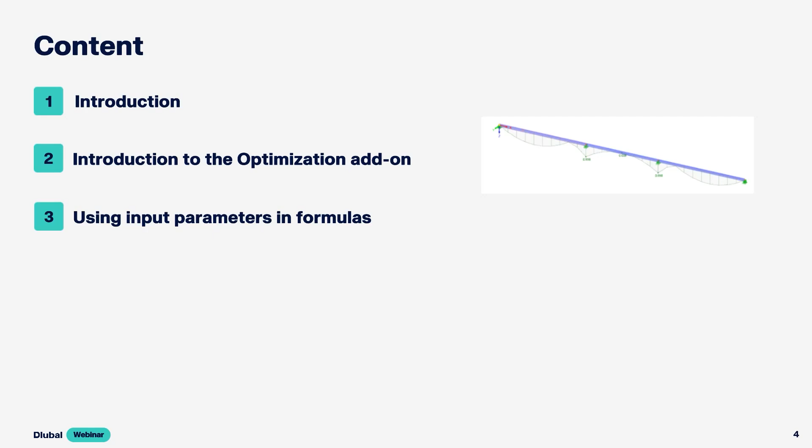Today we want to deal with the optimization add-on, and first of all I want to show you how to activate the add-on and give you a small introduction, and after that I'm going to show you how you can use this add-on to optimize global parameters and how to use parameters in formulas and optimize them. So we are going in.

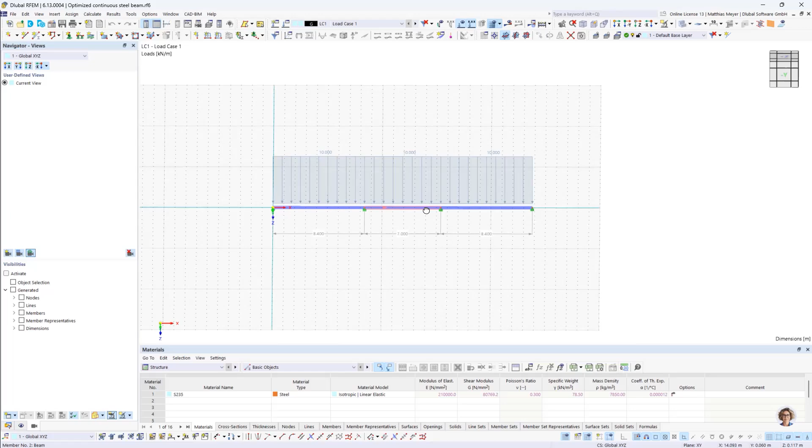First thing I want to do is optimize a continuous steel beam. It's going to look like this. We have two outer fields which have the same length and an inner field, and the length of the outer fields differs from the center field. So we have a symmetric system.

And what we also have is a continuous constant load of 10 kilonewtons per meter. We also want the self-weight activated, and we ask ourselves, okay, how long can this beam be at its maximum, which length it can span. The material is given, and also the cross-section is given. It's an IPE 240 and we have S235 steel. All right.

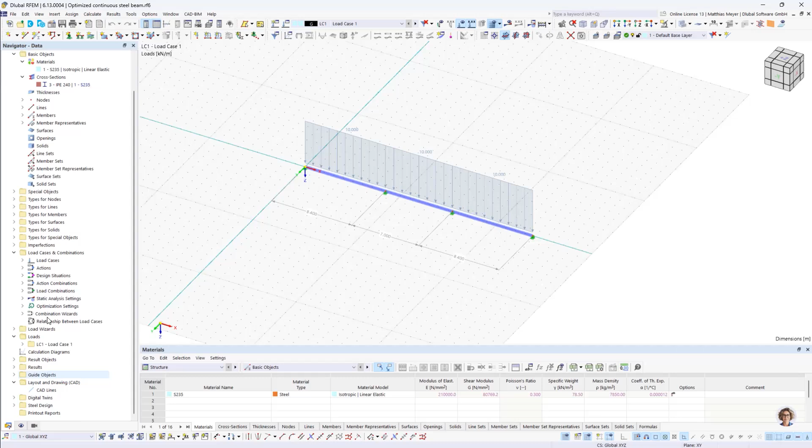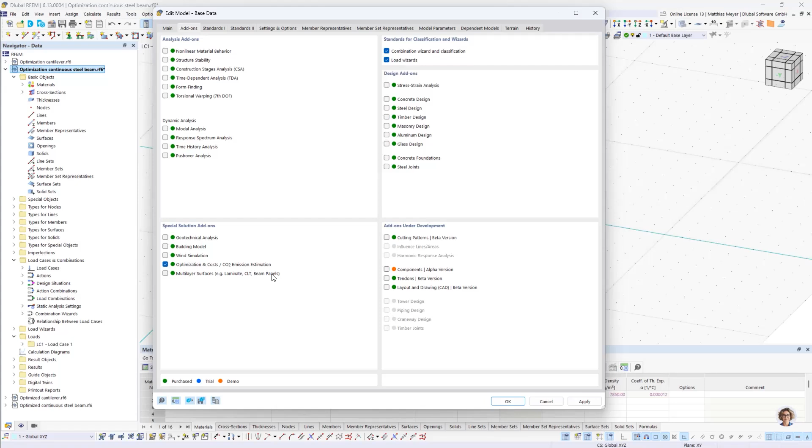So first of all, we have to activate our add-on. We're going to do this at the base data interface. Until recently, the add-on was here on the right side. Now it's on the left side. We activate the checkbox. We also want to activate steel design. And we're going to choose the recommendations of the CEN. And click OK. And the first thing we have to do is define our nodes.

The first node will be at 0, 0, 0. The second node is at 5, 0, 0. We don't know what the maximal span length is. This is just a guess, and for start I'm guessing it's 5 meters. And so the next one is at 10 and the last one at 15.

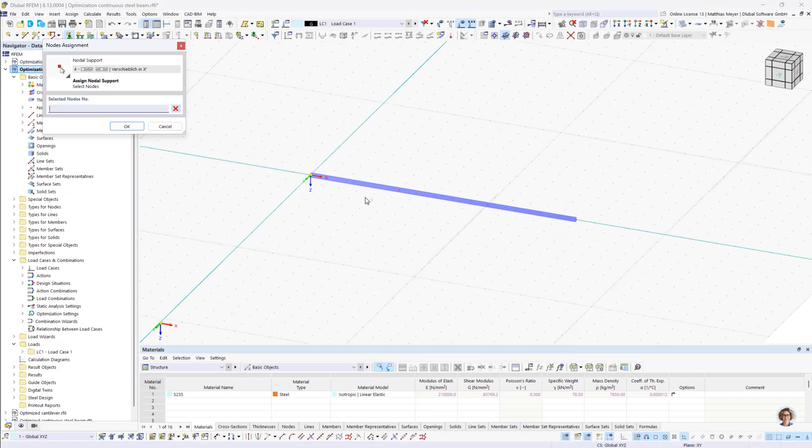All right, then we have to put our beams between the nodes like this. Then we have to add some supports. The first node will be fixed in X direction. Okay. And the other nodes are not fixed in X direction. Okay. Small check if everything is all right. It is. And then we apply some beam load.

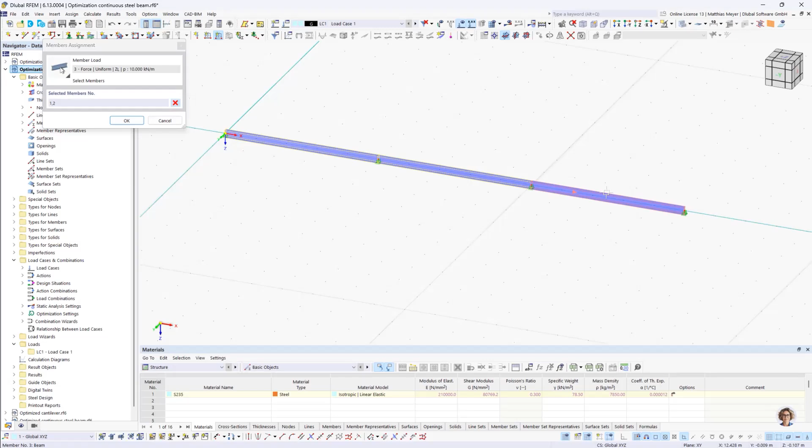Oh, this was the wrong interface. We need this one, of 10 kilonewtons per meter. And like I said, the self-weight is activated. And now we don't want fixed lengths, we want them dynamic. So what we are going to do is we open the nodes table, and now we define some global parameters. I am going to delete them.

Yes. All right. So we go to global parameters like this, and then we call the length of the outer fields L outer. We can also make comments to describe our parameters. Call this length of the outer fields. And then we have a length of the inner field. And give it the same kind of comment.

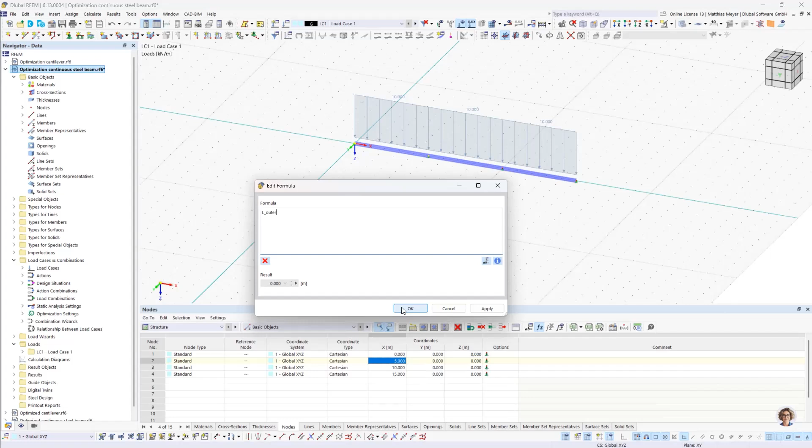And that's it for now. And now we have to make the coordinates of the nodes dynamic. So the first one is still fixed, but the second node should be dependent on the length of the outer fields. So we give it this parameter. We can also switch between parameter view and absolute view.

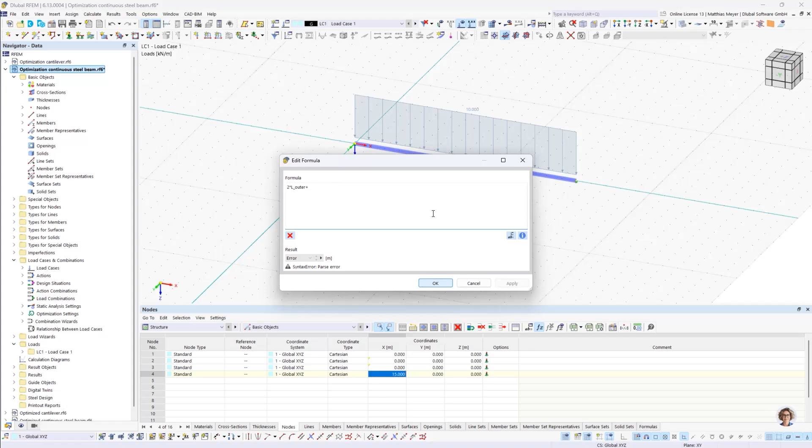So now it's all on 0. Why? Because we have to define some values in here. Like I said, we can start with 5, but we actually want to optimize this parameter. So what we are going to do is we need a third formula for the whole length. So I call this L whole. And we define this as an optimization formula. So we define a formula, and the result of the formula we want to optimize.

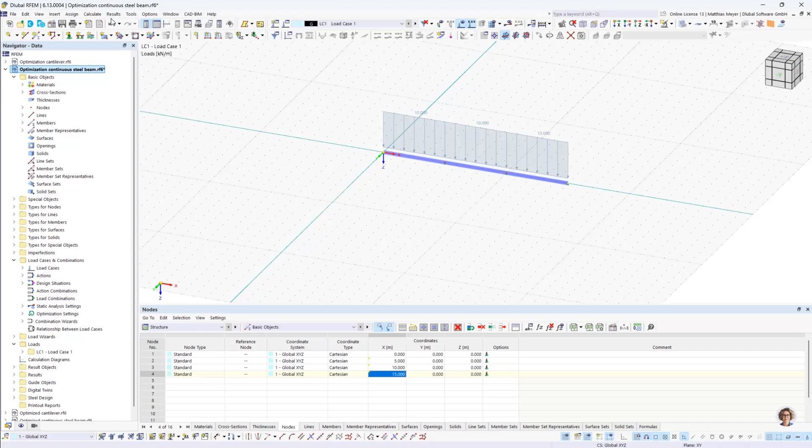Yes. So the whole length is 2 times the outer length plus the inner length. And right now it's 15 meters. And then we press OK. So our beam is back. And now we open our optimization interface here at Calculate, Optimization Settings.

And we want to maximize our whole length. So what we're going to do, we choose max global parameter. This is also new, also min global parameter. So these options are for minimizing or maximizing global parameters. Here we still have a problem because the parameters we need to change to optimize the whole length are not shown here. Why?

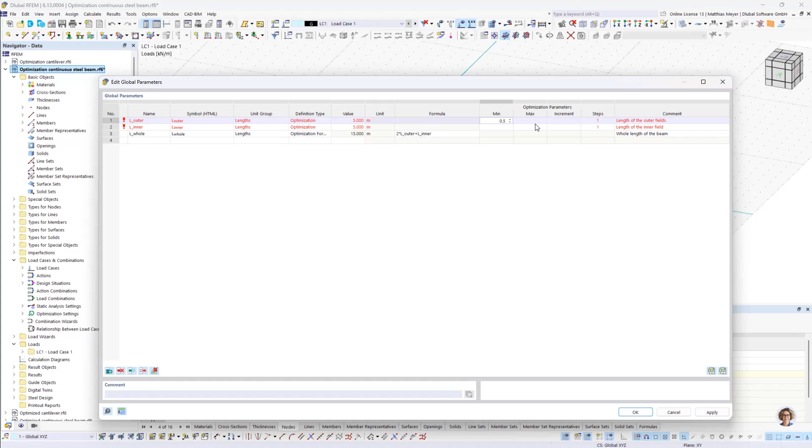Because we need to define them as optimization parameters. And for this, we also have to define a minimum and maximum value of this parameter. I'm going to start with 0.5 and put it up to 10. So here you can also define the range of our parameter. If you say, okay, it shouldn't be longer than 10 or 11 or whatever, you can define this here.

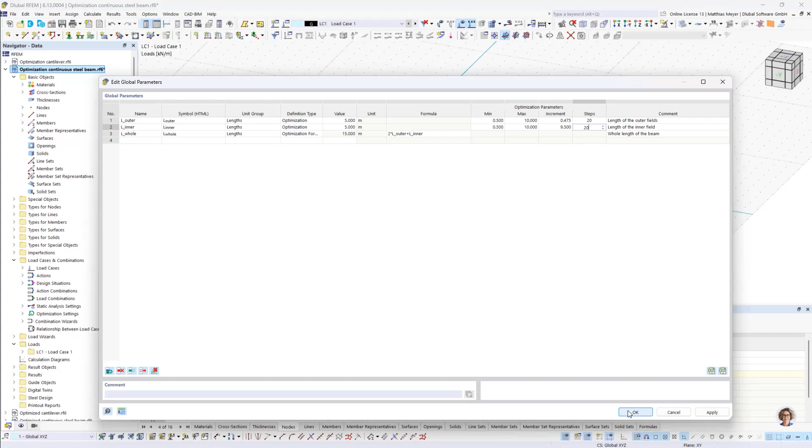And we also need to define how many steps per optimization we want to consider. I'm going to choose 20 for this example. Press OK, and now if we go back in our optimization settings, we can see our parameters here. Right now we have 441 mutations, which is 21 times 21.

So what the program is going to do is that it will start with 0.5 for both of them, and then start increasing one of the values. And when it has done this 20 times, it will increase the second value for one step, and then use all the 20 other steps and so on. So this is like the most simple optimization procedure you can use. There are other possibilities, but for simplicity reasons, we want to stay with this optimizer right now.

All right. Now we press OK. What we have to do first, which I forgot, is to press on activate. And when we have set this checkbox, we can also calculate this. Why is this checkbox here? It's so that you don't accidentally start optimization, because it will need a long time. So what I also want to do is only check the ultimate limit state. So first we go to steel design, deactivate the other states like this. And now I'm going to start the optimization process.

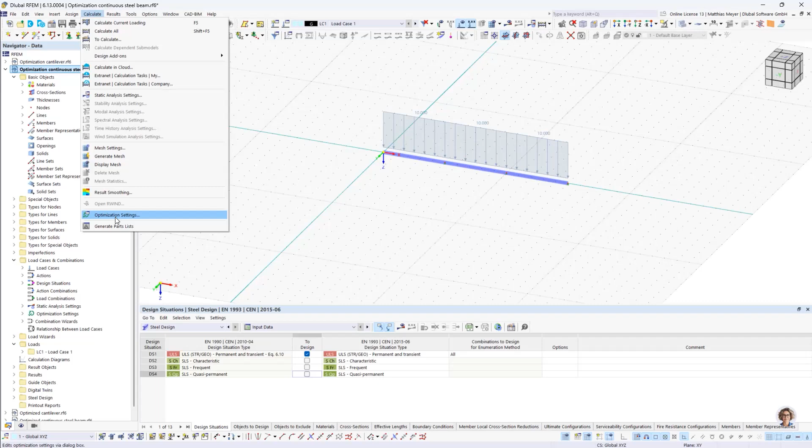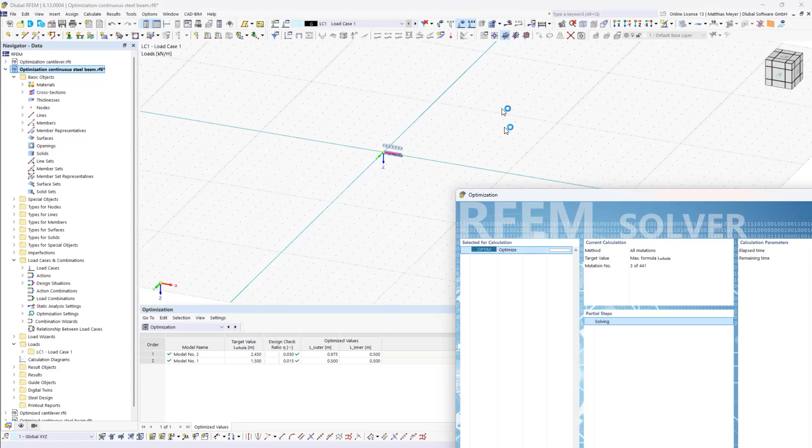And then you can see that it actually needs some time per step. So at one point I will cancel it, but I just want to show you how the calculation procedure is done. So like I said, it starts with 0.5, 0.5. It will also always adjust the model. And now it's increasing one parameter step by step. But like I said, 441 optimization procedures will take a lot of time. So I'm going to cancel this right now.

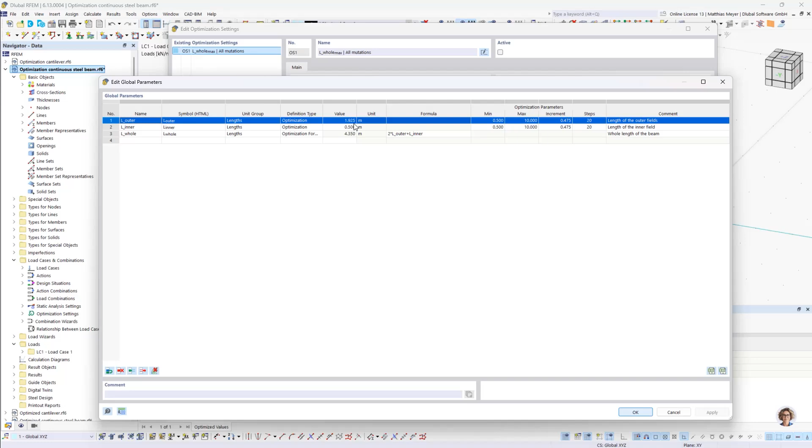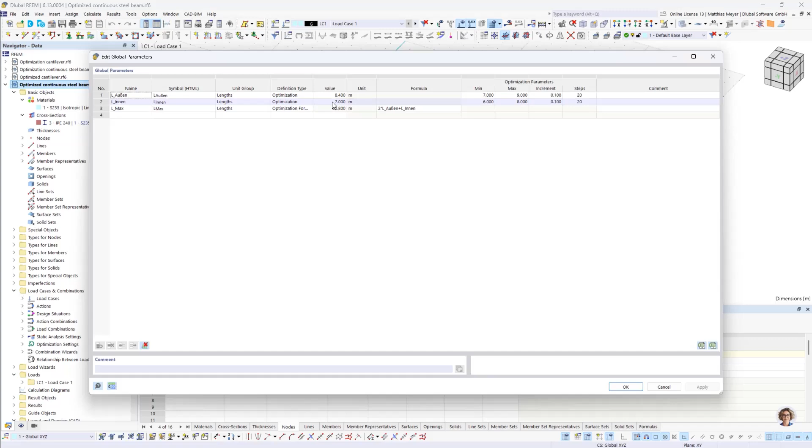Okay. And if you cancel the optimization procedure, it will take the last optimum it could find and will set all our parameters to this last optimum. So it's set on 1.925 and 0.5, and uses this also for our model. Here I have the whole system optimized. You can see that our parameters are set to these optimization values, and I'm going to show you.

Going to steel design. Here you can see the utilization is almost at 1.0. We could use more steps and then we would get closer to 1.0, but for now this is fine. And so for our maximum length, we can use guide objects for this using dimensions.

So in this case, the optimized length would be 23.8 meters. We can also see the biggest moment would occur here over the center supports, and also the outer fields are longer than the inner field. All right, so this was for the continuous beam.

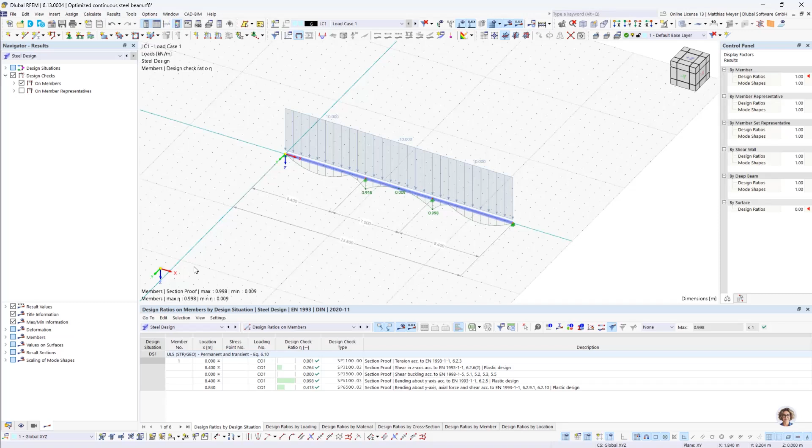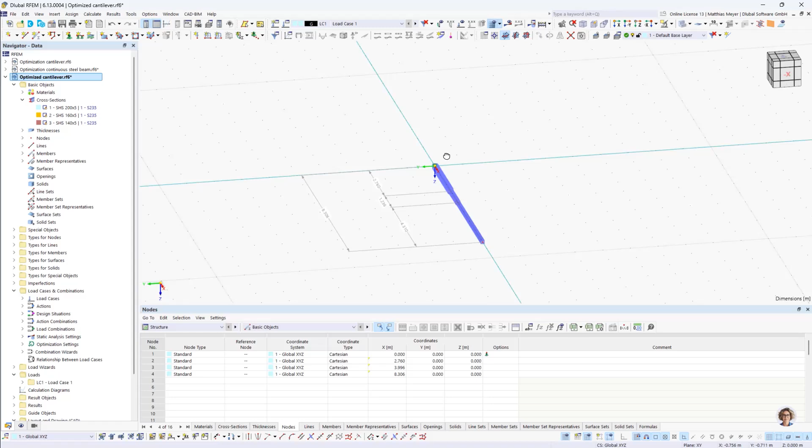And the next thing I want to show you is how we could optimize a cantilever. So we want something like this. We have a cantilever with 3 sections, and for each section we will use a different cross section. Here I choose these cross sections, and you can imagine that

because we have a linear increase of the moment, the biggest moment will occur here at the support. So we need the most resistance over here, and for this reason we could use a weaker cross section at the beginning of our beam, and so on. All right.

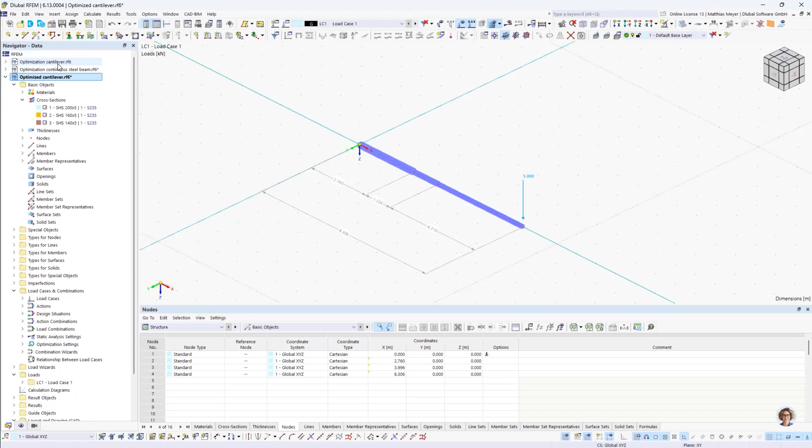So the first thing I have to do is activate our add-on again, also steel design, and yeah, I'm going to use the recommendations. All right, then I have to define my nodes, start at 0, 0, 0, and the first segment will have a length of 3 meters, next one 6 meters, 9 meters. Okay,

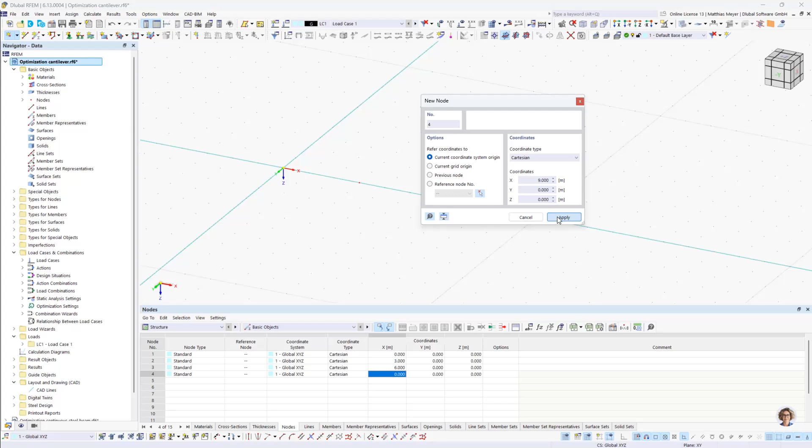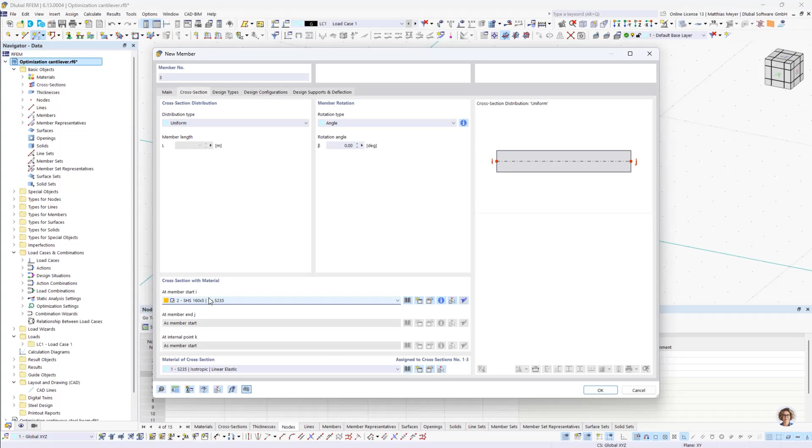then I'm going to apply our beams. Start with the strongest cross section. Then the middle strong cross section and the weakest. Like this. Add a

nodal force, okay, 5 kilonewtons, and then I also need a fixed support at the beginning of the beam, okay, like this. Also the self-load is activated, and now I'm going to define my global parameters. I name them length 1, length 2, and so on.

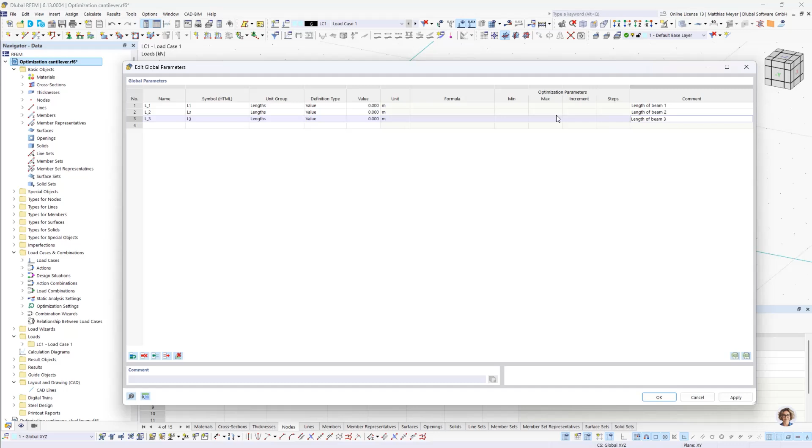And length 1 is the length of beam 1, and so on. Okay, I want to optimize them, so now I will change the type to optimization, and for the beginning we will stay with value, but I will change this after I applied these parameters to my nodes. So first node is at 3 meters, which is 1 times length 1, and so on.

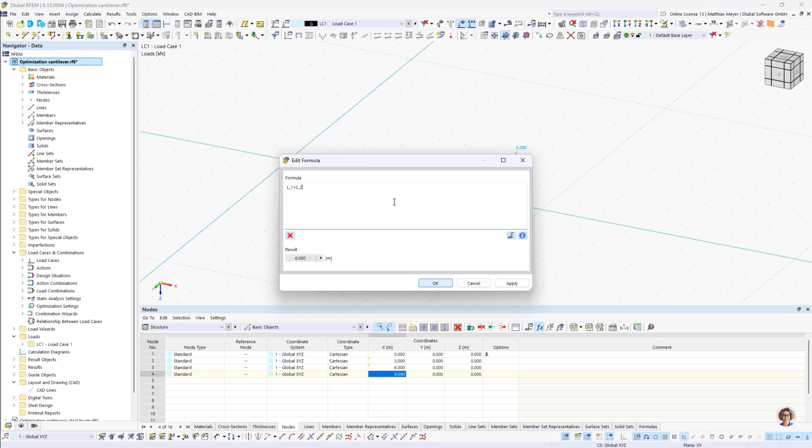All right, and the first thing we are going to do is conduct a steel design procedure one time, just to have an idea about how long our beams or our segments will be. And what we can see is, okay, the first segment could be a lot longer and the other ones are probably smaller. So what we are doing now is going back to global parameters.

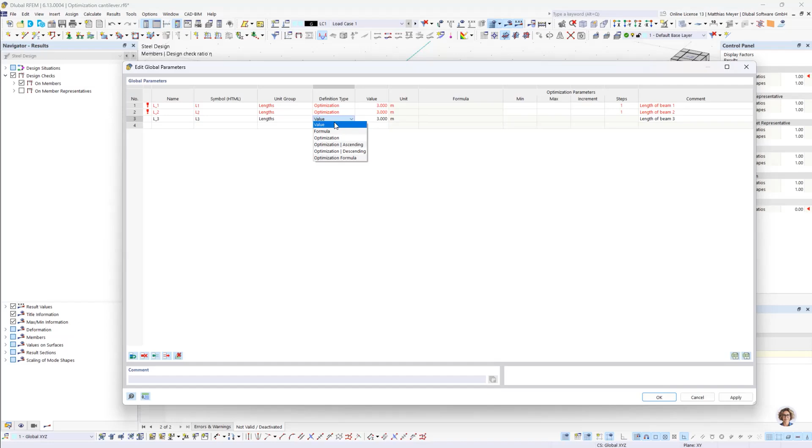We want to optimize them, so we put them on optimization, and length 3, which is the length of this segment, we are going to start with a length of 3 meters and give it a maximum of 6 meters. We'll use 5 steps. And for the middle one, I'm going to start with 0.5 to 2. I kind of know the optimized length, so that's why I'm going to choose this.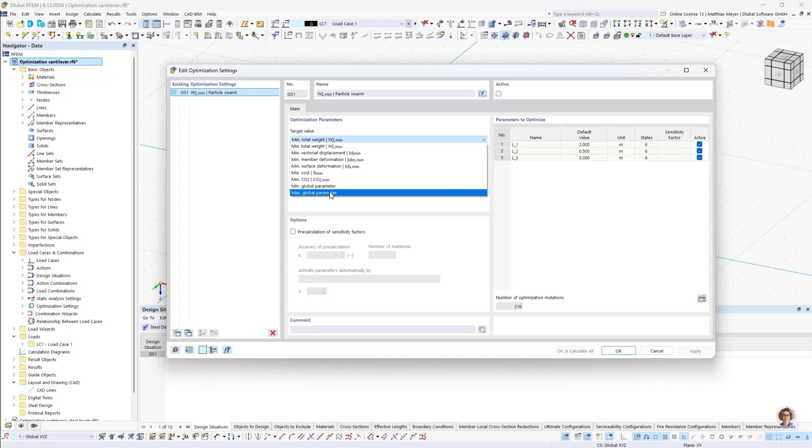And for the last one, for length 1, we start with 2, and it's between 2 and 4. Like I said, I chose these values because I kind of know what the optimized length is. Okay, then after this, we are going to open our optimization settings, and now we only want to optimize length 3, because length 3 is kind of independent of the other lengths.

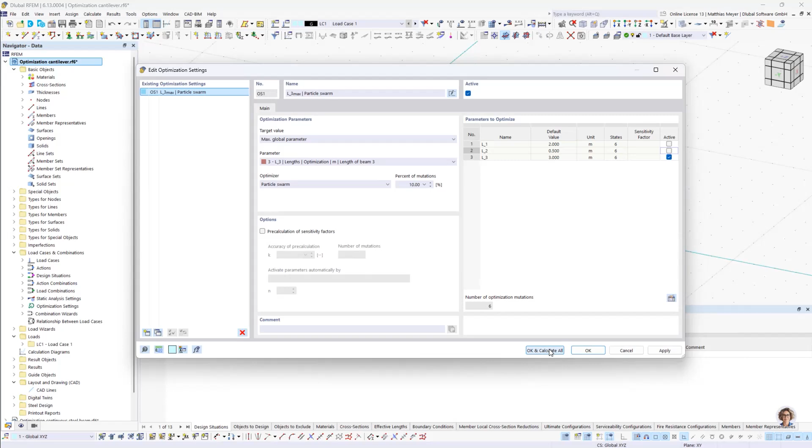And so we have to choose parameter length 3, deactivate the other ones, because we only want to optimize this one right now. Press on active, and then we press OK and calculate. So we have 6 mutations now. You can also watch our optimization process over here. And it's basically doing nothing, right? It's not doing anything.

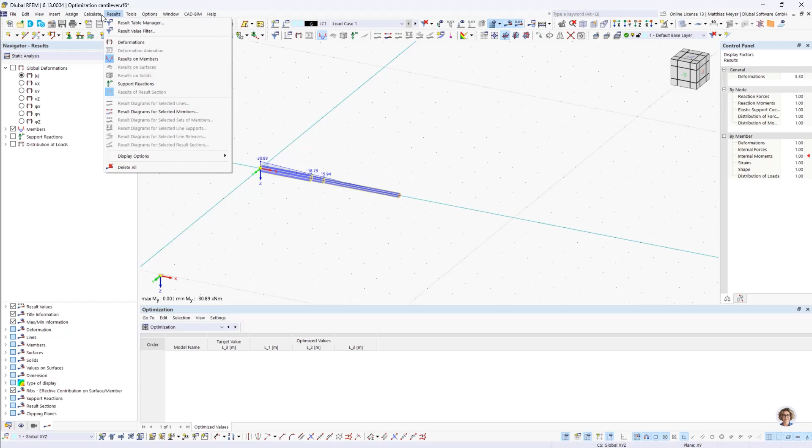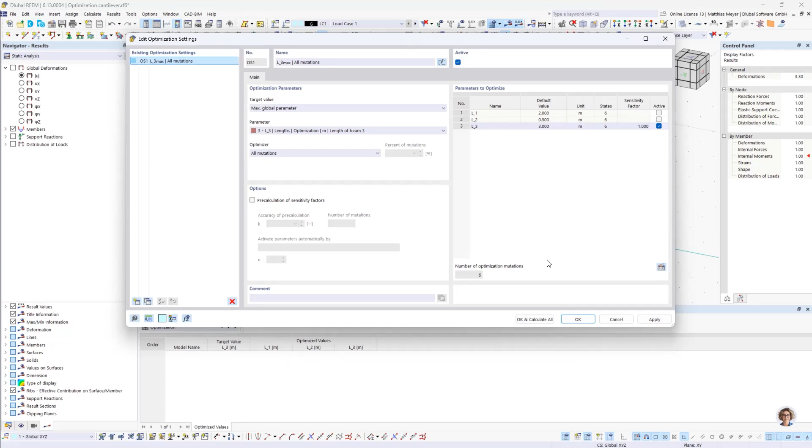Let's check this again. Length 3, between 3 and 6. We choose particle swarm, but I want to use all mutations. So we activate this again. And let's see if it's going to do some optimization now. Yes, looks good. So we start with 3. We have a utilization of 0.6, now 0.8.

And what we can do is, as soon as we found our optimized length, we can cancel this to save some time. So probably for the next one, the design ratio would be too high? Yes, it is. So I'm going to cancel the calculation.

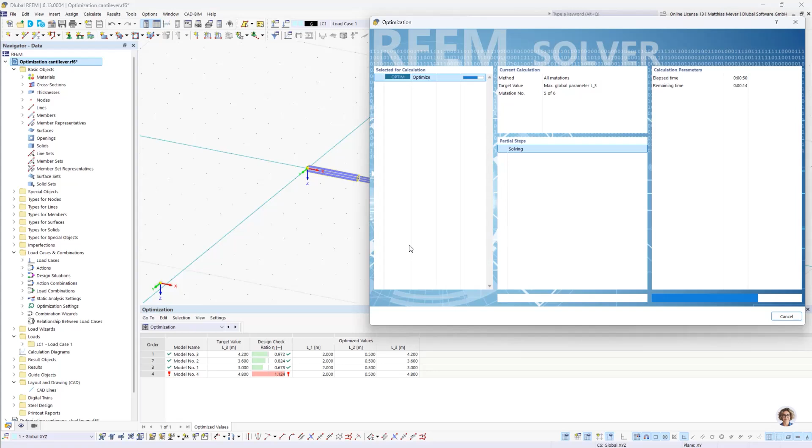All right. Okay. Now this one has a length of 4.2. You can check this by double-clicking on the beam. Yes, 4.2. And what I'm going to do now is go back to optimization settings, and I want to save this value. So I'm going to change this to value, so other optimization processes can't change this value. It's kind of fixed now. The length is fixed. Okay, I press here, and then I will continue with the length of beam 2.

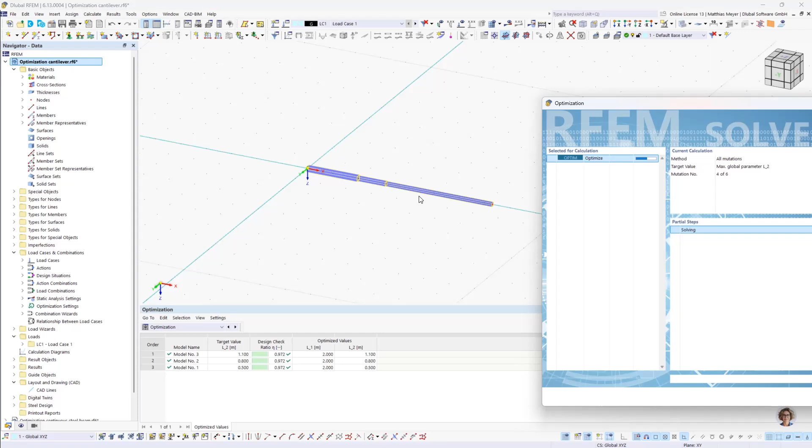Choose the same settings, but go to length 2, activate it, press on active, and we're doing the same again. And now it already starts with 0.972. All right. Why are we still here? Because it still has the utilization of the first beam. But now with 1.7, this middle beam is too long, so the utilization is more than 1. So we can cancel this.

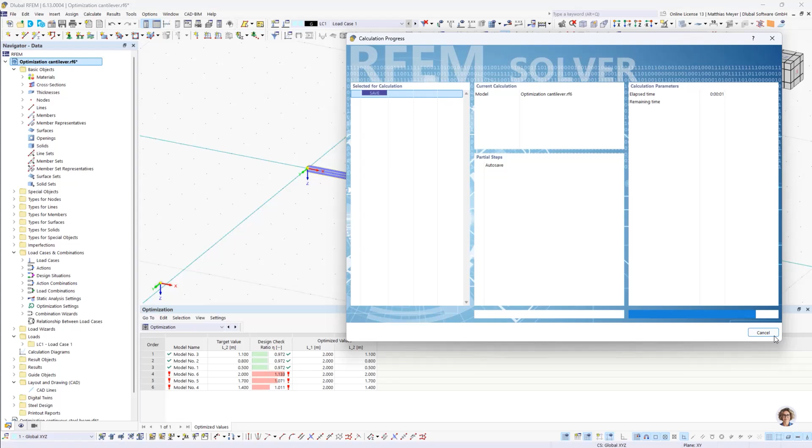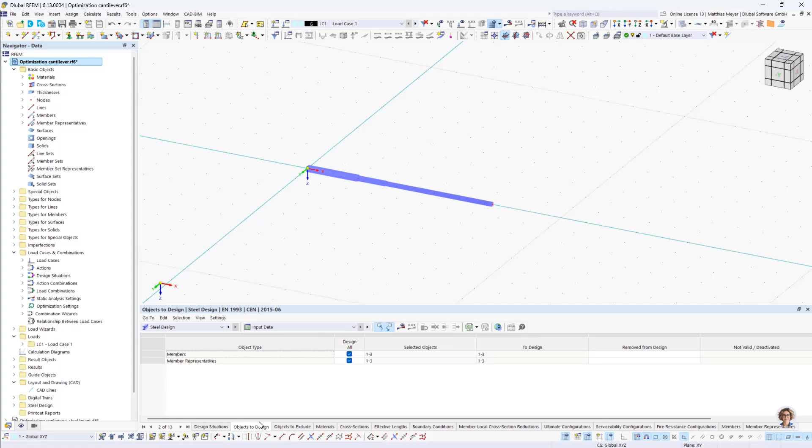And we are stuck with our optimized value of 1.1. We are going to change the definition type to value. Okay. And we also have to go back to this because this no longer exists. And what we can also do is say we only want to optimize beam 1 now. So this can save us some calculation time.

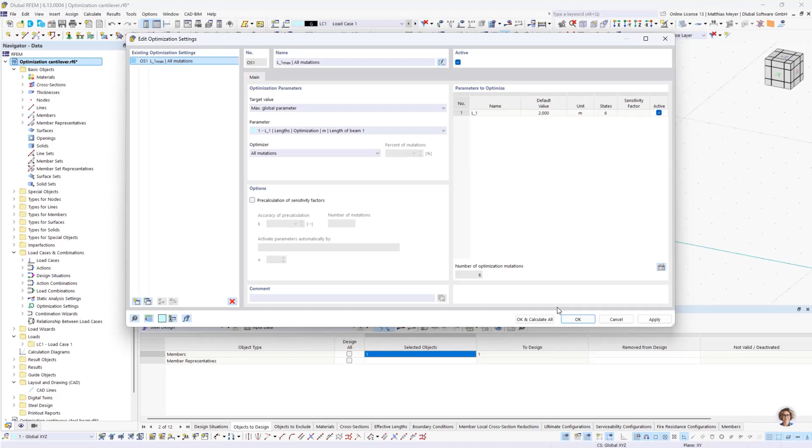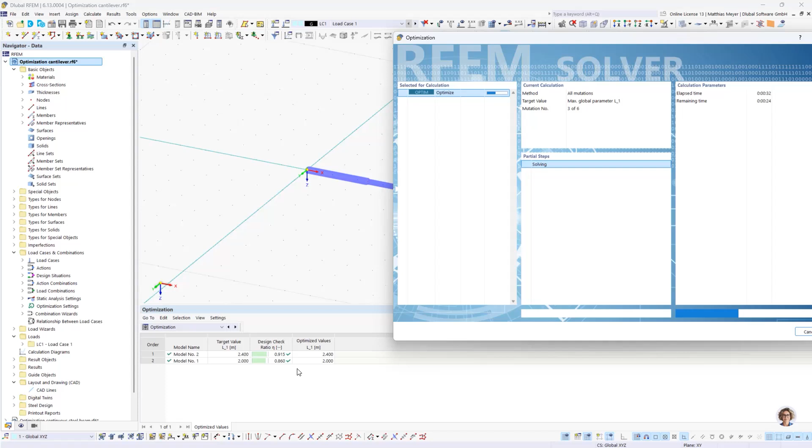And now we open the optimization settings again. We will optimize length 1. Now we have to activate, press on OK, calculate all. And now only beam 1 will be designed, which, like I said, will save us some calculation time. So we start with 2 meters, and then it will be increased to 2.4. Maybe it will do one more. Yes, and probably the next one will lead to a failure. All right, so we cancel. Yes. Okay.

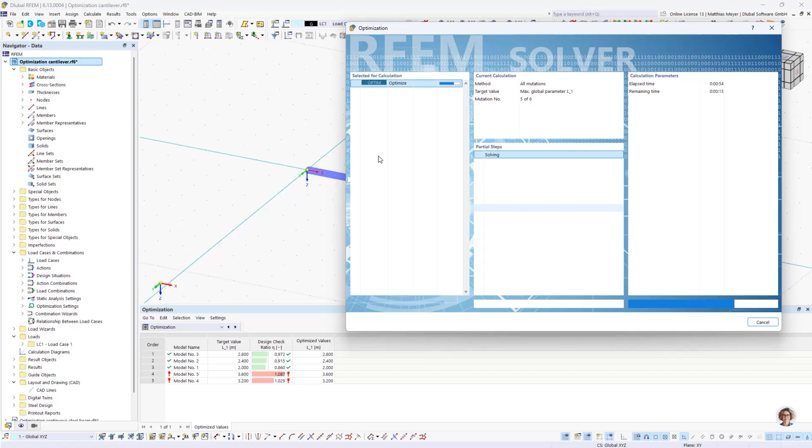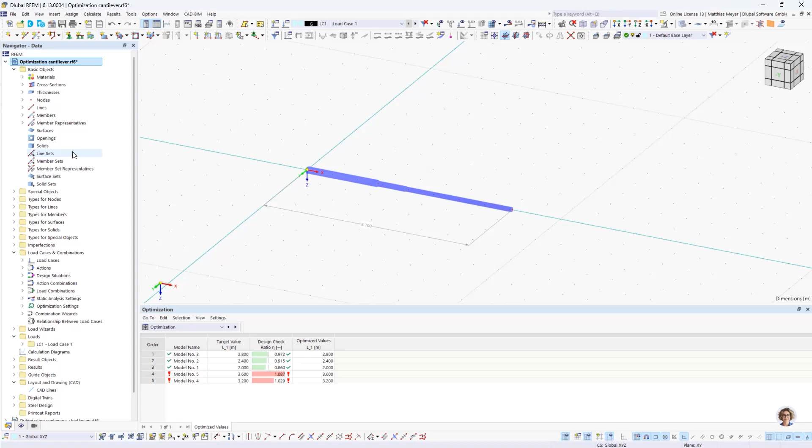Now we have our optimized cantilever. We can add some dimensions. All right. And here we have a length of 8.1. Now I only used 6 steps, which is actually not that much. If we have a look in our steel design calculations and at the utilization of all beams, we'll see that there's still room for longer beams.

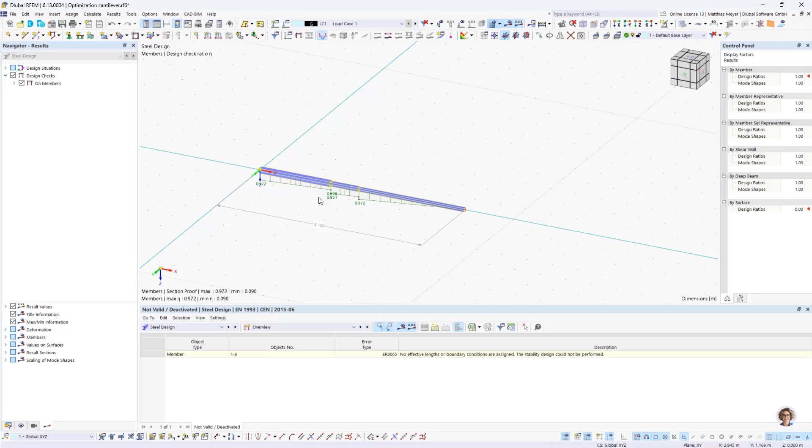But in this example, I used 100 steps. And we can see, okay, the utilization is more or less 1.0, and we have a length of 8.3.